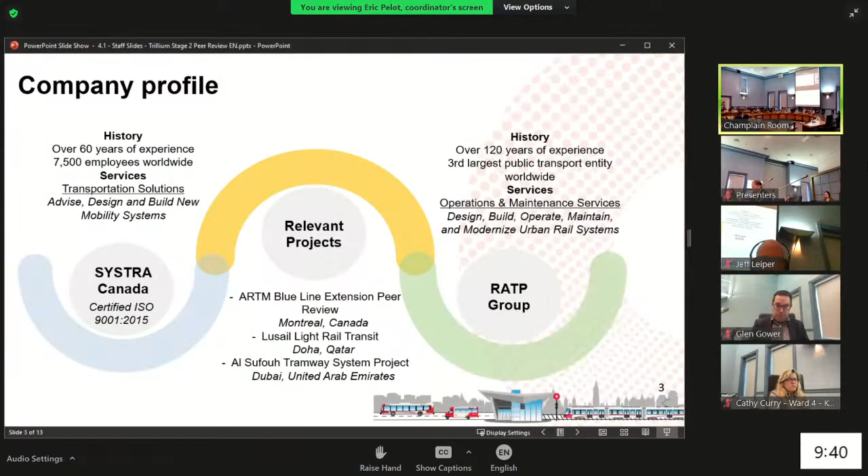Just to talk a little about the process: there was a lot of tabletop documentation reviews. We sent them design documents, review documents, commissioning plans. They also came to Ottawa to do a series of site interviews, interviewing TransitNEXT staff and city staff directly to understand the inputs to the project. They also did site visits to see what was being built and how. That culminated in a series of discussions and back-and-forths where they asked for additional information and clarification, and we exchanged documents to fulfill their requests and give them a fulsome picture of the project. That resulted in a final review and a set of 47 recommendations provided to the city regarding the TransitNEXT and Trillium Line Extension project.

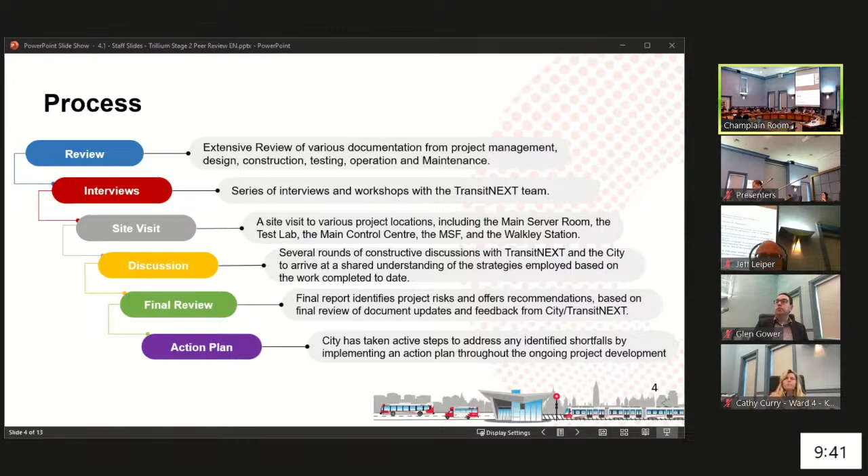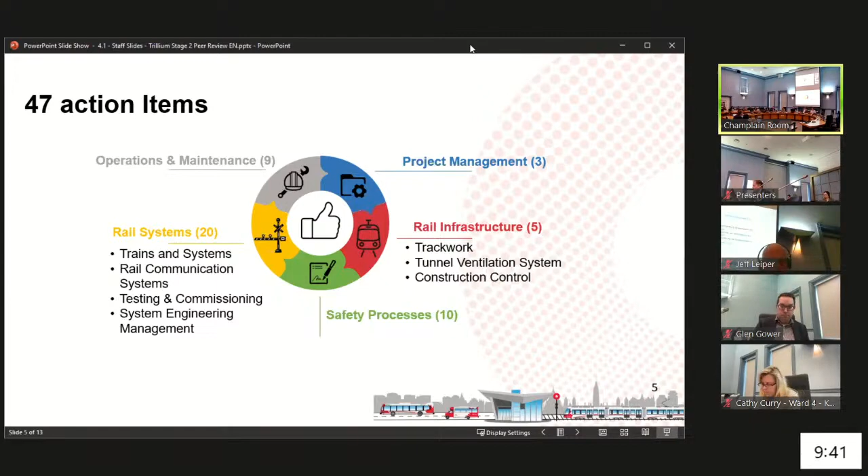So we go to the next slide, talking about these 47 action items and how they're grouped: 9 deal with operations and maintenance, 3 with project management, 5 related to rail infrastructure, 20 related to rail systems, and 10 related to safety processes. I'll give you a bit of flavor for each of those today. I won't go into great detail on individual recommendations since that's in the report, but I'll give you a sense of where we're at and the progress we've made in actioning them.

In terms of project management, there are 3 recommendations. Let's go to the next slide.

There was talk about a new baseline schedule. At one point in the project there wasn't clarity on the path forward, partly because we weren't clear on the training requirements and how those were going to be included into the project schedule. So there was a lot of work through last fall to come up with a consolidated schedule that everyone agreed to—city staff, the training department, all the internal departments, as well as TransitNEXT. That required a lot of coordination, but we did get there, and that was one of the recommendations.

The other recommendation was to have a lessons learned document to support the design and the project going forward. We had a number of lessons learned that were input into this project, and we'll have additional lessons learned that come out of it.

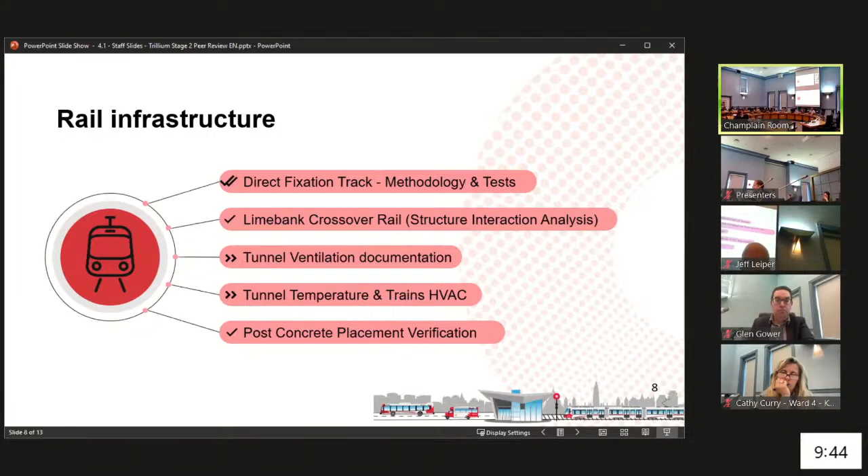In terms of the cold weather test, this was a new one that hadn't been considered, where essentially you turn the vehicle off, allow the batteries to get down to a low temperature, and make sure the vehicle can start up in the morning. We had a cold snap earlier in the year where we were able to take advantage of that weather and actually do the test with the vehicle, and it passed. So that one will be closed off.

Interior and exterior noise tests—we're saving those until we have the full alignment. We'll run the train up and down the alignment and measure the noise levels on the interior of the vehicle to make sure they're compliant with expectations. The interior test is for passenger comfort, while the exterior test is for nuisance or noise to the community. We'll be doing both of those tests in the future once we have access to the full alignment.

Bogie rotational resistive test, vehicle vertical gaps—a couple other ones that we're good with.

One more that we do need to do is the GEBR, or Guaranteed Emergency Brake Rate Test. This is a test where you're basically forcing an emergency brake on the train on the tracks to ensure that you meet the minimum stopping distances. So this is really putting the vehicle through its paces. Again, we want access to the complete system to do this type of test.

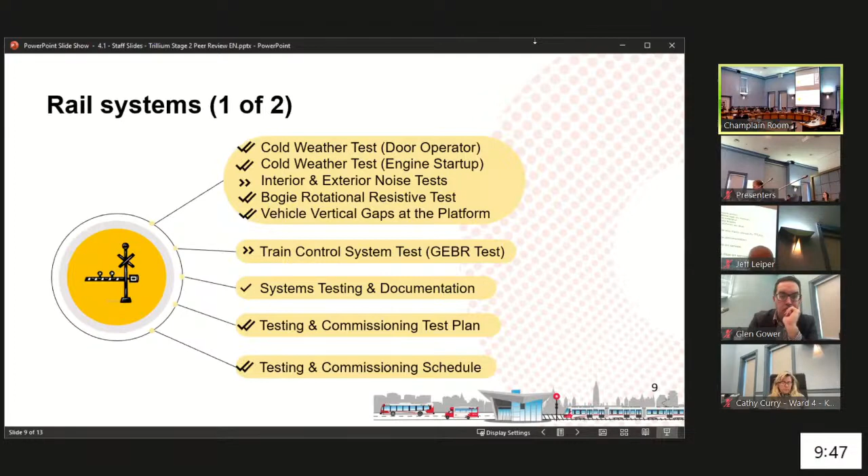As we think about the Trillium Line going forward, we need to think about how to incrementally add double tracking along the alignment. The crux of the problem is really in the north. When you go from Greenboro to Bayview, that's where we have the rock cut, the road structures, and the bridges. That's where the work is required in order to add more double tracking and reduce the headways. That's how we would get additional capacity in the future.

There were some questions about minimum achievable headway and South Keys turnaround time. Some of those things we will demonstrate and validate during the testing program. Once we have the complete system and can demonstrate the 12-minute headway, that's where we'll start to play with the trains in and out of South Keys going to the airport and along the main line, making sure the passing meets are correct, and making sure staffing levels are suitable for the turnaround times at the end of the line—at Bayview, at Limebank, at South Keys, and at the airport.

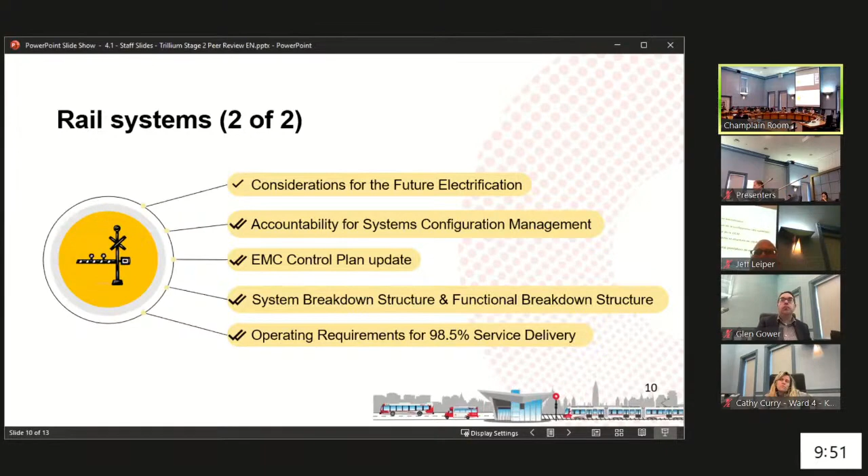So with that, that's a quick run through of the 47 recommendations, and happy to take any questions you might have about those. Thank you.

Questions from committee members? Councillor Leiper. Thank you. I may need to go back on, but I'll get through a first batch to begin with.

The first question, I'm wondering if the representatives from Systra, who I believe are online, could we just hear from you the degree to which you agree that the staff report that's been sent to council is a fair representation of the current situation, a fair characterization of your recommendations?

You mean the presentation that was just done right now? The oral presentation, but we were also given a written staff report that characterized what the recommendations were and what the staff response was. I'm hoping you've had a chance to read that and can characterize it as an accurate summary of this process.

I believe we did not get this report that you are referring to. However, the presentation that was done reflects what we have said in what we have written in our report. Okay, thank you.

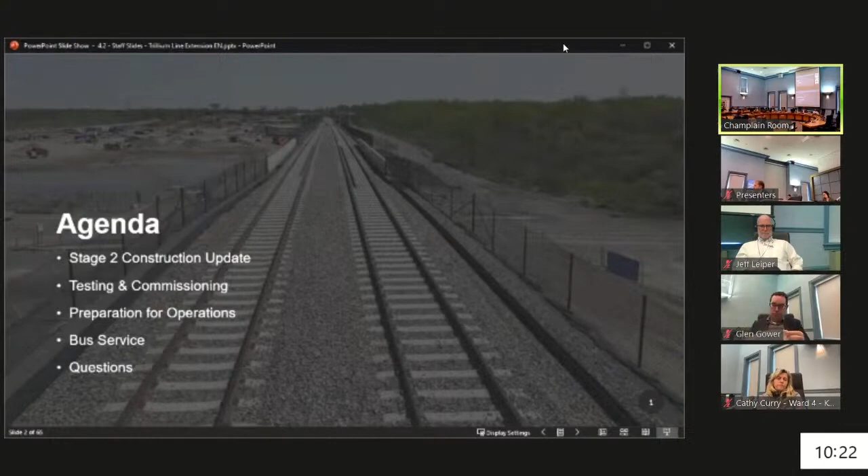So talking about the O-Train South, the next slide talks about Line 2 and Line 4, the new nomenclature we're using for the lines. We'll start at the next slide, which has a photo of Bayview Station.

So Bayview Station, this is the new head house. As we go through construction, I am going to point out some things that we are speaking to the contractor about deferring - that is, we want them to prioritize staff and construction activities on things we need. One of the first things we've discussed with them is the idea of deferring completion of the Bayview pedestrian bridge.

I'd rather have them focus on other stations that we're actually going to be using. That bridge, as you can see in the photo, doesn't go to a development just yet. So we've essentially agreed with them to put that on the back burner and come back and finish it later - that would include the elevators and the pedestrian bridge structure you see on the right.

In the middle of the picture, there will be a fare gate bank and an additional entrance for people coming from that direction, so that will be opened. But the rest of the pedestrian bridge isn't required for service this year, so we basically told the contractor they can prioritize other works on the project.

Next slide, we'll talk about Corso Italia. On the right-hand side is where Ottawa Community Housing has a development in the works. On the left, there's a development application in place for a tower.

So it'll be a very busy community. You see the platform doesn't look finished, but they've got a lot of protective measures on the actual platform itself to prevent it from being damaged. The glass is largely up. If you go to the next slide, you see a side shot. The glass is largely in, and there's some finishing works on the roof lines. Down on the platform level, they are staging some of the glass, but the transit shelters are in, the light stands are in. It's in pretty good shape in terms of the station.

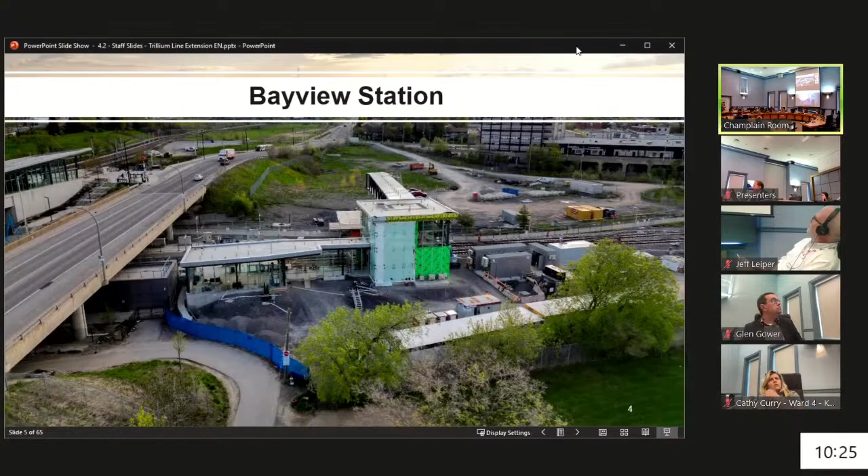The next slide just shows the platform view. You see the platform edge on the left, covered in plywood just to protect it from construction damage. The tracks are in place. Those on the left actually lift up to allow a freight train to go through as part of the federal regulations. You see the glass on the right, the bird-friendly glass for the elevator banks.

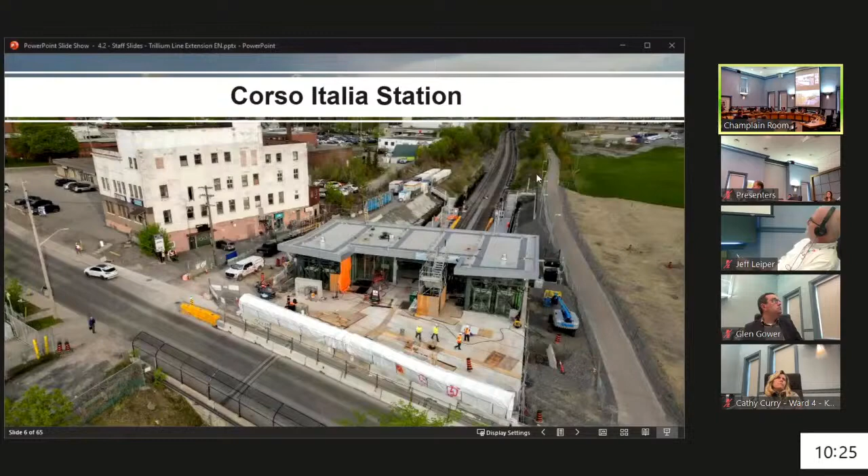In terms of guideway progress, it is coming on well. We have one little gap on the network right now at Hunt Club Road. Otherwise, the tracks are in everywhere, and they're doing some touch-ups. That piece of equipment you see is basically like a person lift that runs on the tracks, allowing them to do work on the cabling and such in the tunnel.

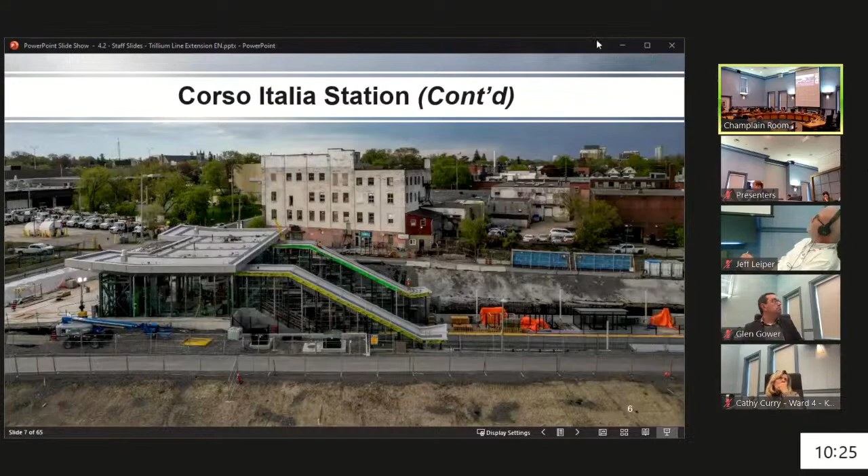So on the next slide, you see the tunnel, the new top corners, and the new jet fans we've installed for the tunnel ventilation system, the cabling along the side to provide radio coverage for emergency radios for emergency responders, as well as the coverage for cellular phone calls. So a lot of progress there.

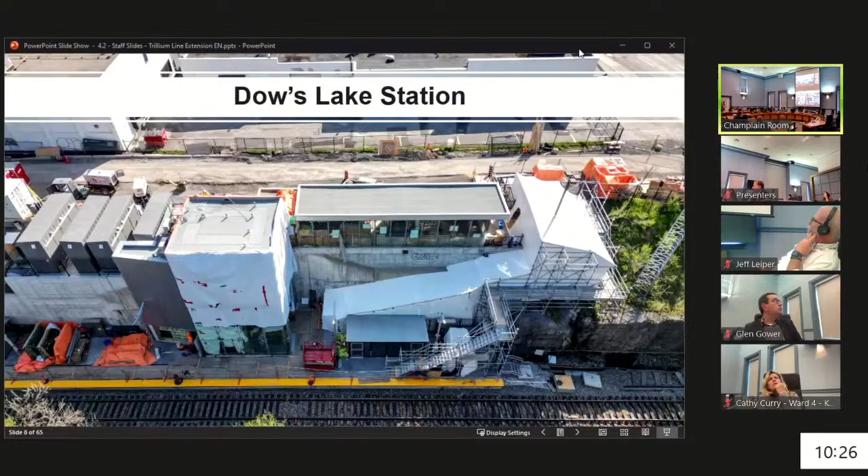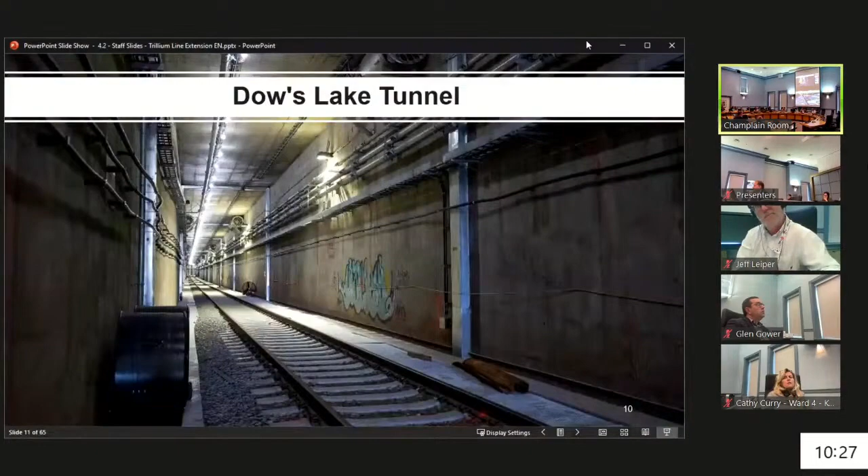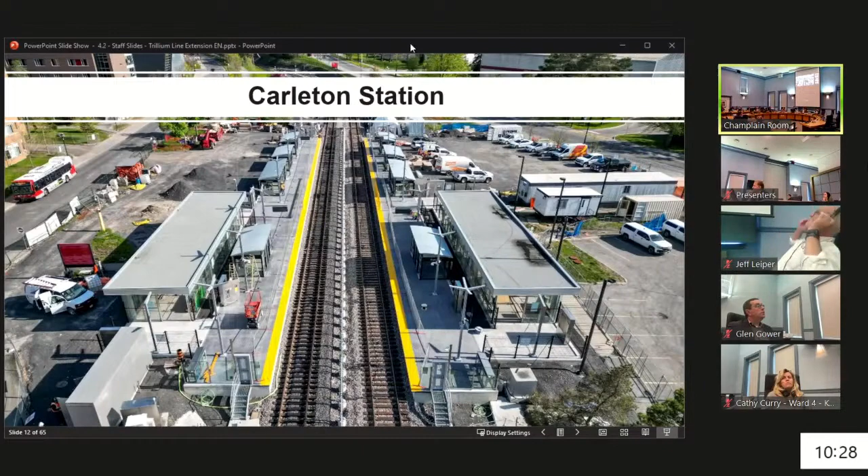There's been lots of questions about the multi-use pathway that connects to the development. That's just been paved recently. We're looking to finish the final connection into the development, and at that point the multi-use pathway would be restored to get from the general area of that development, Bank Street, up to the entrance of the station.

The station platform down below is in great shape. It's essentially finished, so this is probably one of our most advanced stations. Now we'll see some shots of Albion Yard.

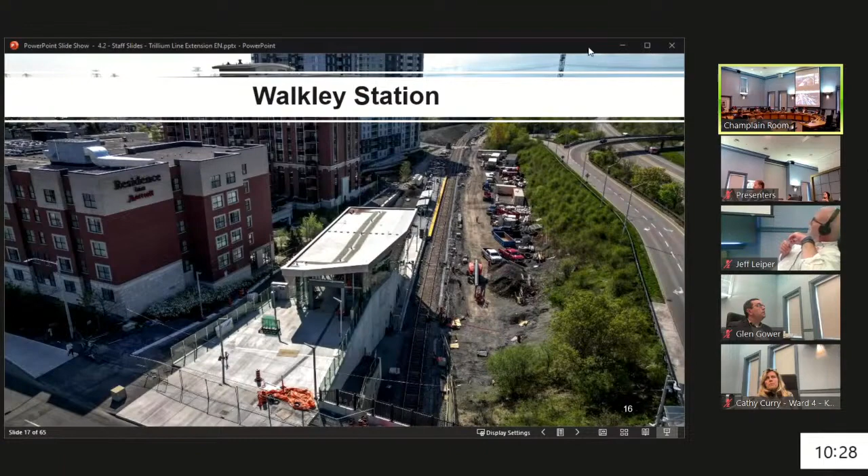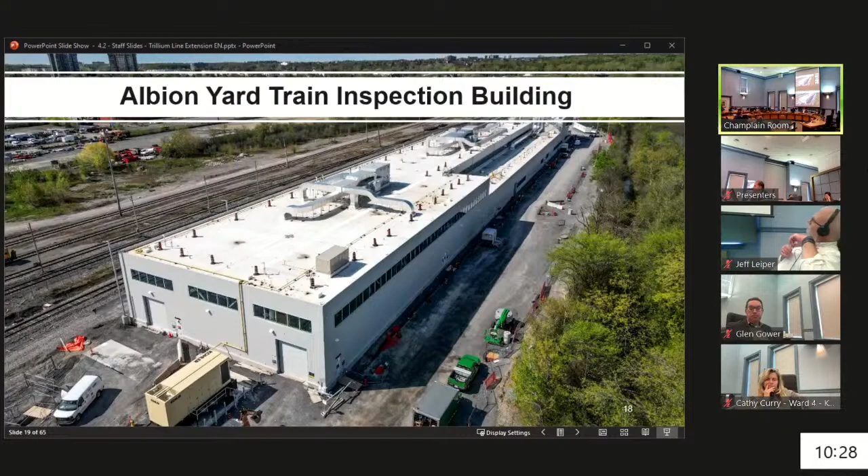We continue to do some works on Albion Yard. Here's an inside view of the jacking equipment to work on the trains, and the jacking equipment's in place. There's the lifts to work underneath if you need to do a bogie replacement, so that's a big series of lifts for the vehicle.

The next one shows the wheel lathe. In the previous incarnation of the Trillium Line, we didn't have a wheel lathe, so if we had a wheel flat, we'd have to send the wheels out for service. That was a bit of effort we had to do previously. Now that we have the wheel lathe, we're in good shape. We didn't have many problems with wheel flats in the old system, so I'm not expecting a lot of issues, but we have it in case there's an issue.

Greenboro Station shows basically finished as well, moving on to the landscaping at this location, which is a very good sign - a pretty good indicator that they're wrapping things up.

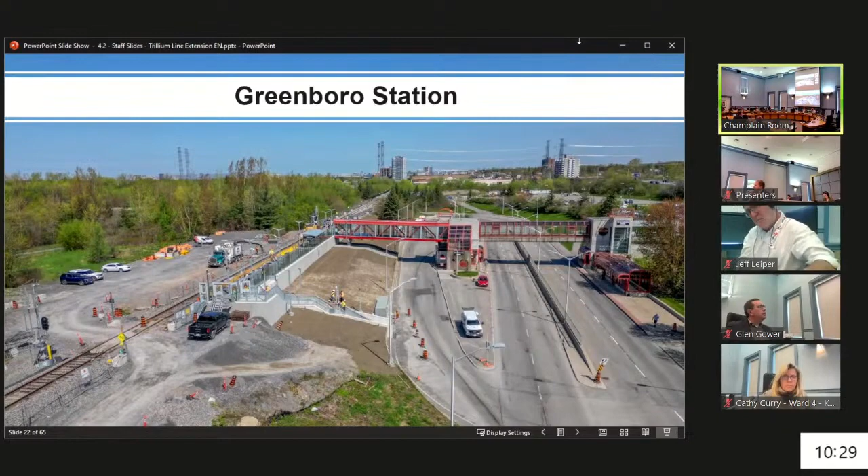South Keys Station, still a lot of activity here, some finishing on the roof line. Platform's in good shape, all the glass is generally in place, and they're doing some work on commissioning the systems now.

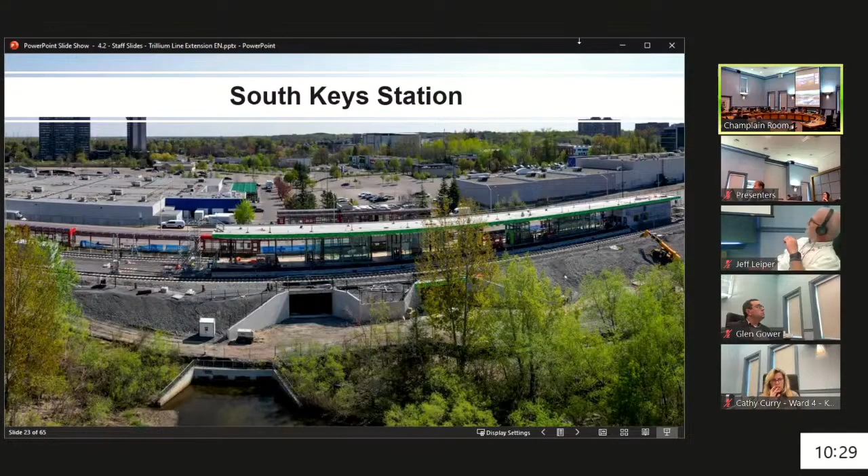Leitrim Station next, just to give you a sense - they are finishing that roof line, but if you look down at the bottom, all the glazing is in place. The next big activity in this area is to start the work on the park and ride and the bus loop around the bus operator building.

Just a look at the platform of Leitrim, you'll get a good sense of the completion. The fence that's there is just a construction safety fence. You can see the platform edge devices are flipped up, and that's to allow a freight vehicle to go through if it needs to. Those are on all the stations on the line.

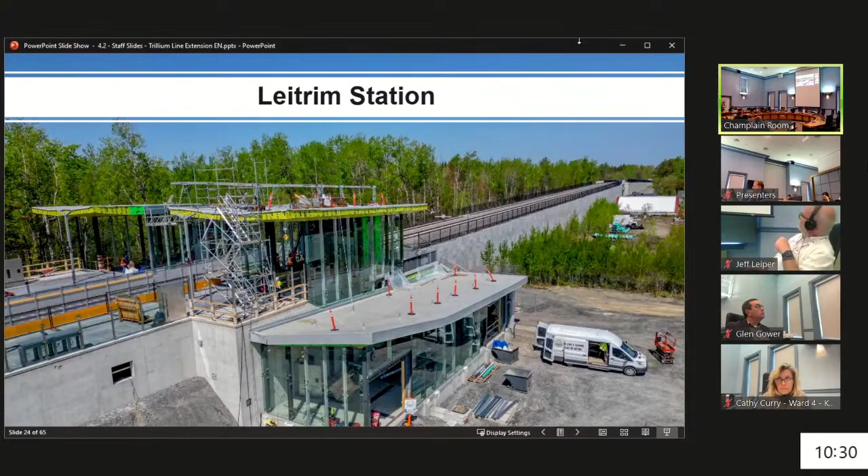Next we'll see Bowesville Station - pretty good progress here. The next big activity is finishing up a little bit of that, closing in the yellow you see on the roof line, the green on the sides, and then working on the park and ride that's in the distance in the photo.

Limebank Station is next. Here again you see them finishing up where you see the white tarps - that's where the elevators are still being commissioned and putting in the final glass. We visited the station the other week, and there's a beehive of activity and a lot of progress here. The next big activity in this location is to get the roads and the bus loop finished.

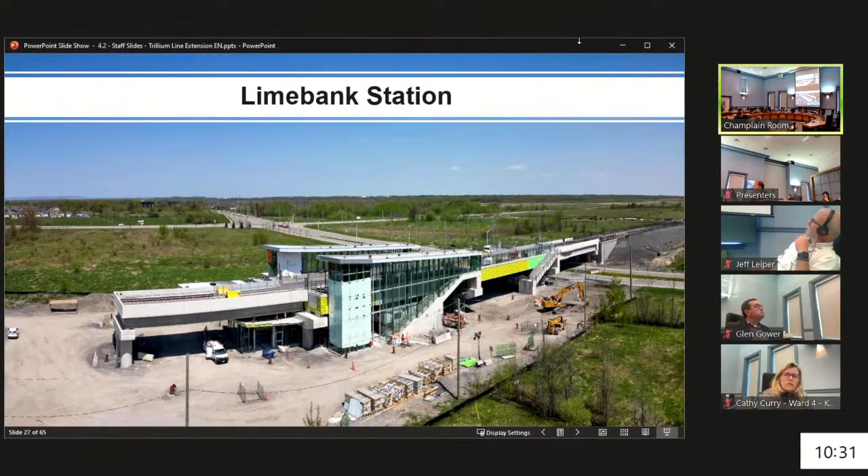There's a photo of the train at the station, which is very exciting - there's also a short video of that we'll show after. Uplands Station, next to the Ernst & Young Center, is in decent shape as well, a little bit lagging behind in terms of the roof work and finishing that up, but that should go quickly now that the weather's turned.

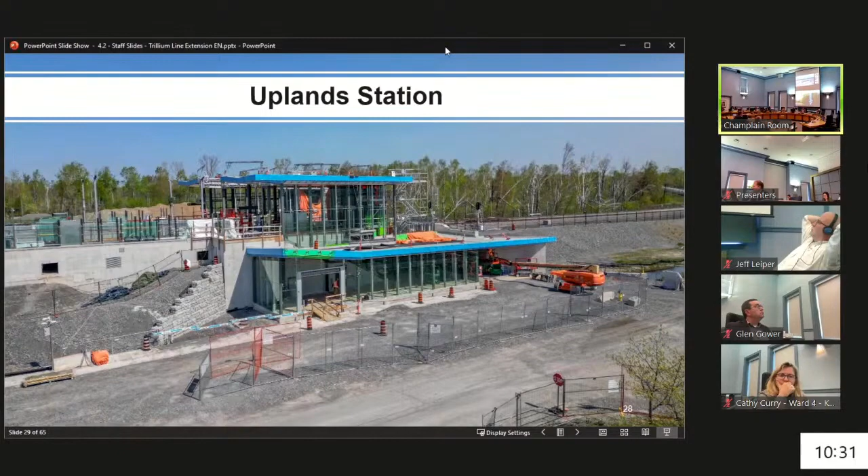In general, the signal progress is going well. They are planning on commissioning all the signal systems over June and July, and by the end of July we'll have a good sense of where we are with the signal systems and the signal testing.

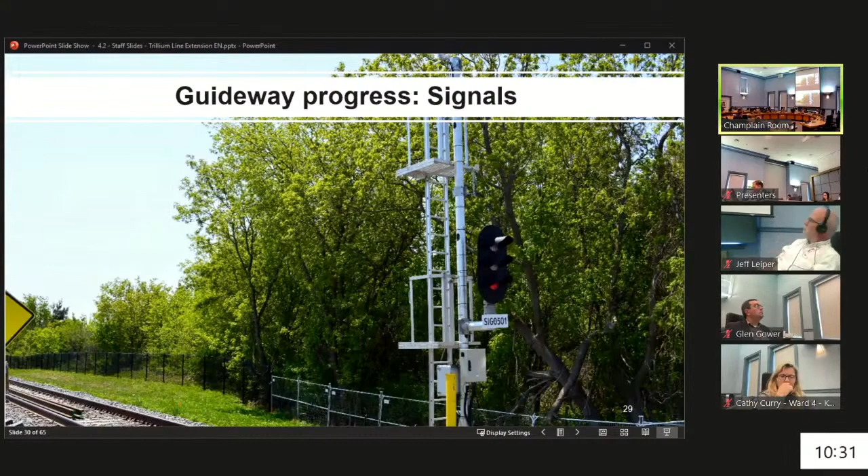At Airport Station, basically the only thing missing is a fiber connection back to our control center in order to enable the fire system. Otherwise that station's largely complete. They're working on the signals at that location. You see in the middle there's a little signal tower, but the first train was out there the other week. So good progress all around there.

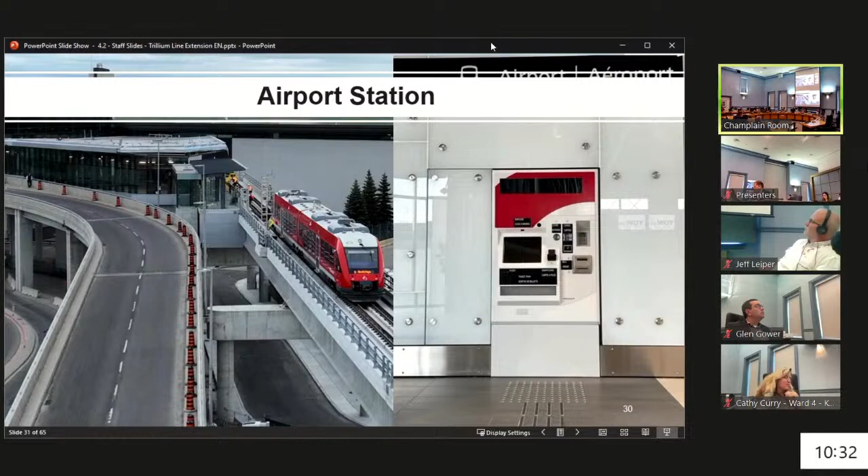So that's the construction eye candy. I'll go through some of the details on the actual report that we provided. Next slide, we'll jump right in.

Talking a little bit about remaining works: track installation, that's the little chunk of track required at Hunt Club, Stadler vehicle testing, signal testing, station completion is really where we are. And then trial running, substantial completion.

In terms of the mobility impacts, we don't need to spend too much time on this because a lot of the mobility connections have been restored. The big ones the community is excited about: at Hunt Club Road we are going to put a pedestrian bridge. It's built, it's there in place, but we need to connect the multi-use pathways to get pedestrians to the bridge, and then they'll be able to get across Hunt Club, and then the Rideau River pedestrian bridge. So pretty good shape there. The mobility detours and impacts are reduced significantly now compared to a year ago.

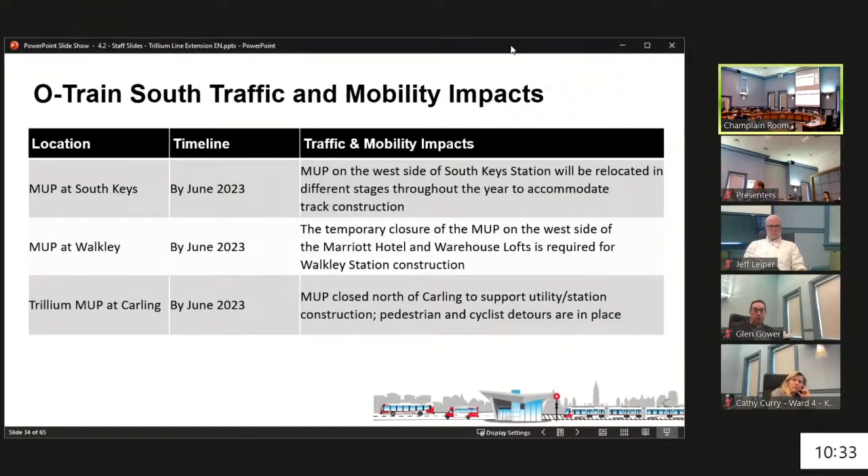The next slide talks a little bit about the impacts on a couple of different locations where we just need to be on the lookout. They are still doing lots of heavy activity, so there are moving closures for some of this work. We talk a little bit about the road work, and obviously the big one in the south is realigning that Bowesville and Earl Armstrong intersection. That's a big change in the south.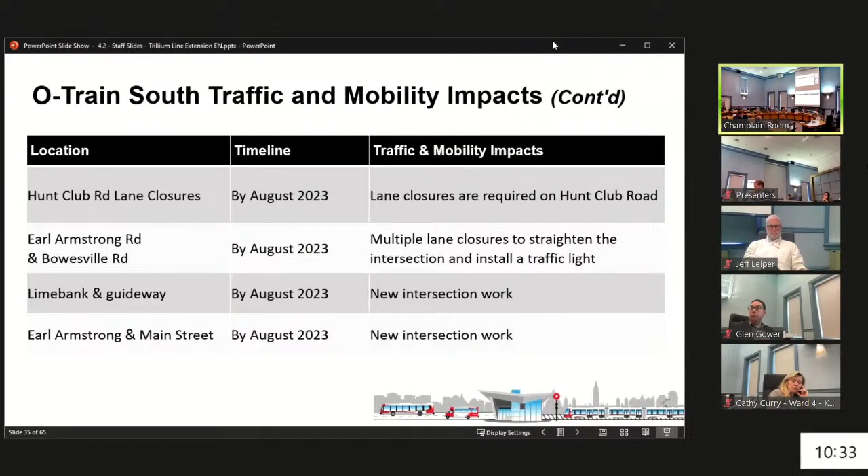This is some of the information that was included in the report. Generally on a big project like this, the number one thing is to make sure that we don't have a safety incident during construction. If we have an issue with a train or a worker or anything, that could potentially cause human harm, which is unthinkable, but would also have an impact on the schedule. So we're doing everything we can to avoid any incidents during construction, during testing, commissioning.

The second part of that is if we find a safety issue during the testing program - we go to run the trains, run the system, and find some odd behavior that from a safety point of view we hadn't picked up during design - that's not covered. If we needed time to rectify that, it could create additional time and pressure on the project. So that's the first point we're tracking: safety during construction and safety of the design.

The second thing in terms of project risk we're tracking is the system performance testing. We've talked about the 12-minute headway and turnaround time already. We need the system to work and to work reliably. If we have any issues with the trains over the summer or the testing program, that could be a challenge and could require time to correct. If it's a big software change affecting the signal system, which is safety critical, that would require time. So that's something we're watching and monitoring to make sure we don't have any issues.

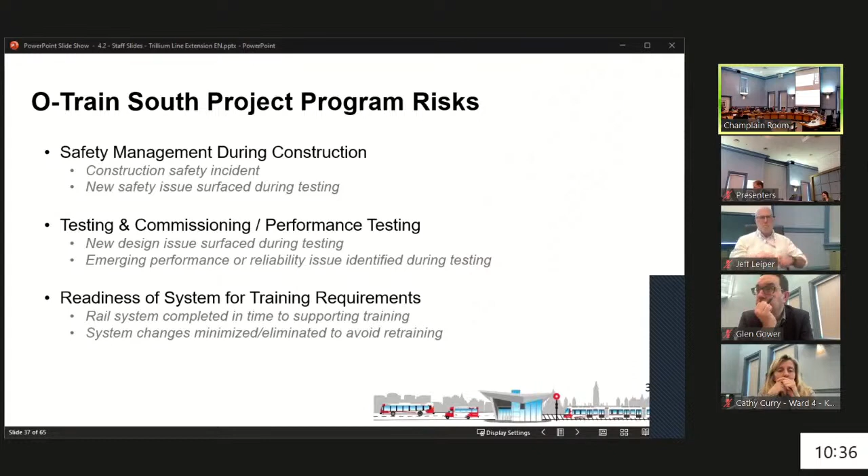There was a new regulation that came out over the course of the project in relation to a locomotive video and voice recorder. That's a device in the cab that's looking at the operator, monitoring their activities and recording any sounds in the cab.

That's a new federal regulation. Those units have been purchased, but the supplier has indicated a delay with those units to September. So we're tracking that closely. We have a follow-up with them in June. But right now, that is a potential risk to the project.

And there are other regulatory risks that we see arising. One of the items, for example, we've been asked to put a wayside detection unit on the system. Not that we've ever had a problem or an issue with journal bearings or vehicles that required a wayside detector in the past, but I think partly stemming from some of the things that we saw in stage one, Transport Canada has asked us to put that in, and so we're tracking that.

So there are things like that coming up from the regulatory point of view that present some risk to the overall schedule. The next one on the slide there is just the remaining works. When you look at some of the stations, some look very advanced, some are a little bit further behind. The park and rides, they need to make good progress on those over the summer.

There are some elements of the park and rides that we've said they could probably take a little bit of extra time with. We're still kind of negotiating that. There are some secondary roads that aren't required at the outset of revenue service, and so we may work with them to see if some of that can be deferred in order to make sure the overall project opens in a timely fashion. And then, as you continue civil works, if we find anything in the ground that we didn't expect, that will be a challenge as well.

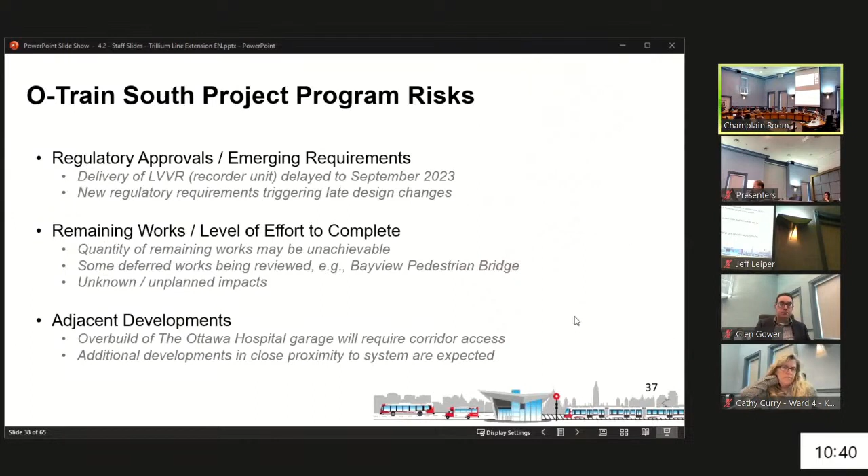The tunnel ventilation system needs to be brought online. So we test those as much as we can in the factory. Then we bring them to the field, test them in situ, and then we test the connections and connectivity back to the control center to make sure it's fully integrated. And then that ends with system-wide performance testing.

So it's really just running the trains, 12-minute headway, with 9 trains in service, 2 on the Airport Link and 7 on the main line, making sure we can meet the performance criteria, making sure they're reliable, that we have no issues, and all the switch machines are reliable. So the proof is in the pudding. We need to run that system August and September to really know that we're ready for trial running.

I spoke about it earlier, the head end. If you go to the next slide, this is a quick snapshot of the temporary test lab that city staff have built in one of our facilities, where we've set up all the servers on the desks. You see the various servers for the different devices on the wall. They've actually mounted a speaker and a camera against the plywood. There's a platform information display on the floor. So they've literally built a little mock transit operations control center in the room to validate that everything's working. Once that's done and complete, they'll move that equipment into the control center, into its final place, and then the operators, the controllers will start using it from there.

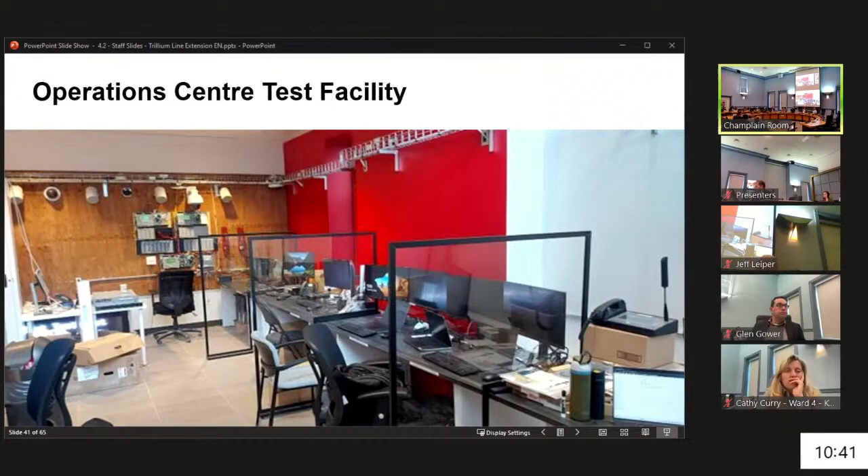If you go to the next slide, we're going to talk a little bit about trial running. There are 4 slides here to get through and provide as much clarity, and give you an opportunity to ask questions about the trial running process. Obviously the primary intent is to demonstrate that the system is working end to end, that all the processes are in place, that maintenance staff know how to maintain the system, and that operations staff know how to operate and control the system. So those are the big objectives.

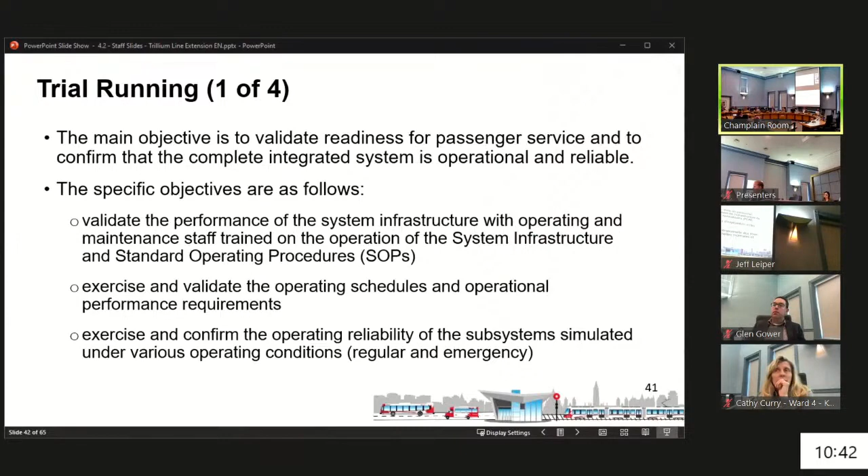As a result of the public inquiry, we have asked the system integration verifier, Ricardo Rail, to provide an independent view on trial running results, any changes or modifications to running times or different things, so they would be there to provide an independent view, and they would be part of the reporting back out to council on the trial running results.

Renee has talked about it previously, and we're committing to it again here: providing daily reports to council during the trial running period, followed by a technical briefing at the end of the trial running period, giving you day-by-day results, rolling average outcomes from the procedures, the testing, the different scenarios that we do prior to going into service.

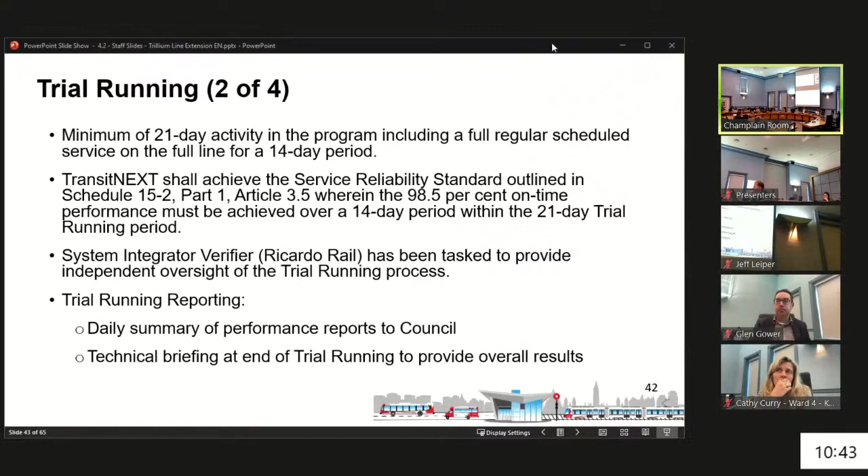On the next slide, 98.5 is a roll-up of a lot of other things. It's simple to say 98.5, but it requires a lot of things to take place correctly. For example, the vehicles need to go out on time in the morning, clean and ready to go. They need to come back at the end of the night, be refueled, sand has to be added, they have to be washed interior and exterior, and need to be ready and staged to launch on time the next morning. It can be great to run a perfect score the first day, but all those vehicles need to come back into the yard and be set up for the next day. So there'll be a team of people on our side monitoring all those inputs.

It's not a specific measure in the output, but if those inputs aren't done correctly, then you'll never hit the 98.5. If they can't fuel those vehicles overnight in a timely fashion, we won't hit the 98.5. So there'll be a team monitoring all of those inputs, looking for safety incidents, looking for anything that's a no-go to our customers. Like if we lose a set of elevator banks at a station, that's just not an acceptable scenario to us. So this is a snapshot of that list.

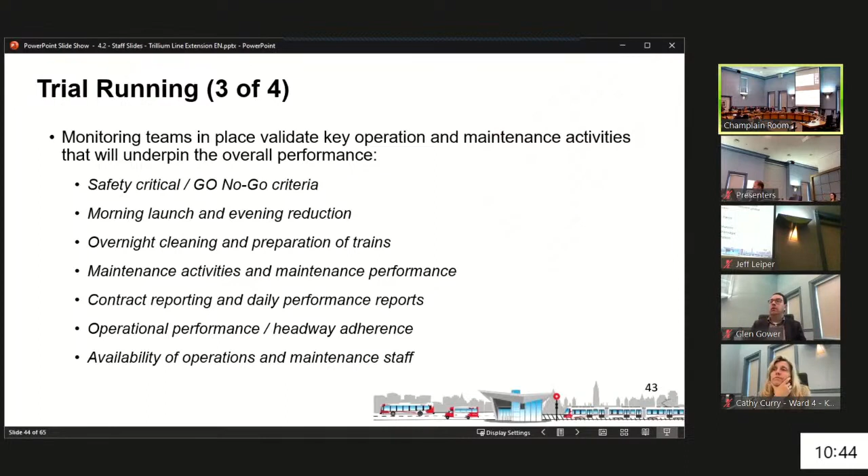We may circulate another version to give you an opportunity to provide feedback. 98.5 is the big one, the work orders is a second. We assume you'd also want additional commentary or color around how the day went, so we can talk about what that would look like. We're happy to provide feedback or information the following day about the day's performance, to give you a clear understanding of what's taken place and what's not.

So that's trial running, and I'm happy to take questions at the end about that.

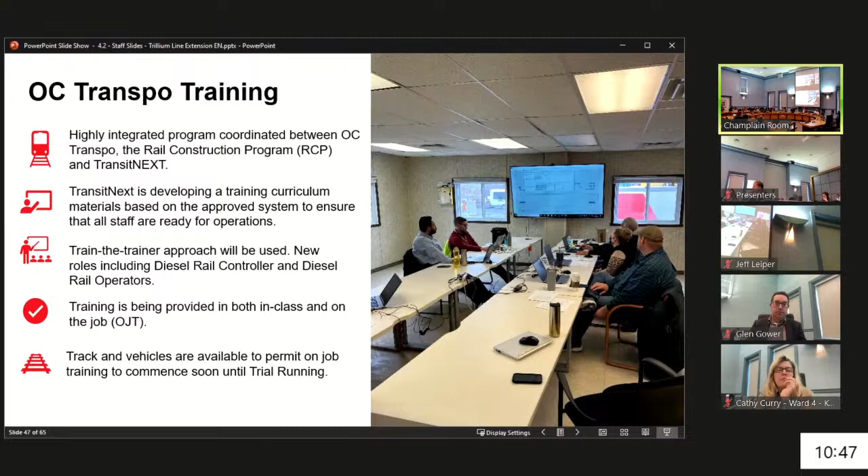There's an app built in stage 1 that's being expanded in stage 2 for emergency responders to understand the system and how it works, including the access points along the guideway. If a train gets stuck and you need an evacuation, what's the nearest point you can get to? There are some remote locations on the Trillium line, but there are also a number of access points along the line where they'd be able to get to.

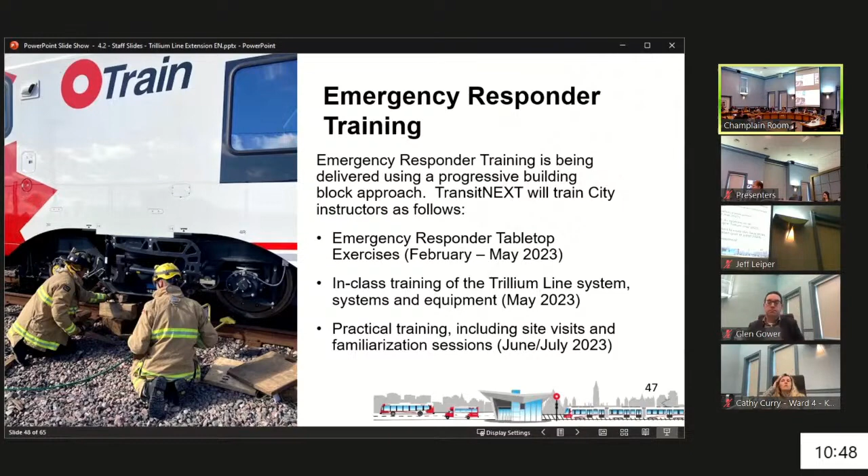On the next slide, we've been doing integrated tabletop exercises between operations, emergency responders, and others. There will be a full-scale exercise with emergency responders and the airport authority prior to going into service, currently planned for September—a final check that everyone's trained and understands what the protocols are.

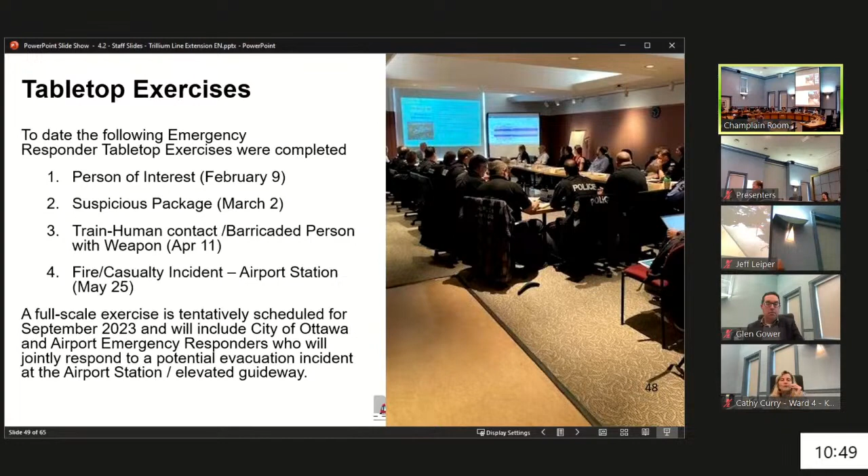So that's the training. The other big activity that leads to safety certification is the application of the CENELEC standard, and having the independent oversight of the independent safety auditor working on behalf of the city to validate that everything TransitNEXT is doing is correct. So TransitNEXT has brought a very strong safety assurance team to the table.

This slide really, I talked about those things in very abstract ways, but at the end of the day what we're looking for is a safety certificate for the system. We're looking for the design process, the construction process, the commissioning process, all to be signed off, resulting in an engineering safety case. That's really what we use to say the design and the system's been built. Once we have that in hand, that's when we can start letting passengers on from a design point of view. But that's not the final step.

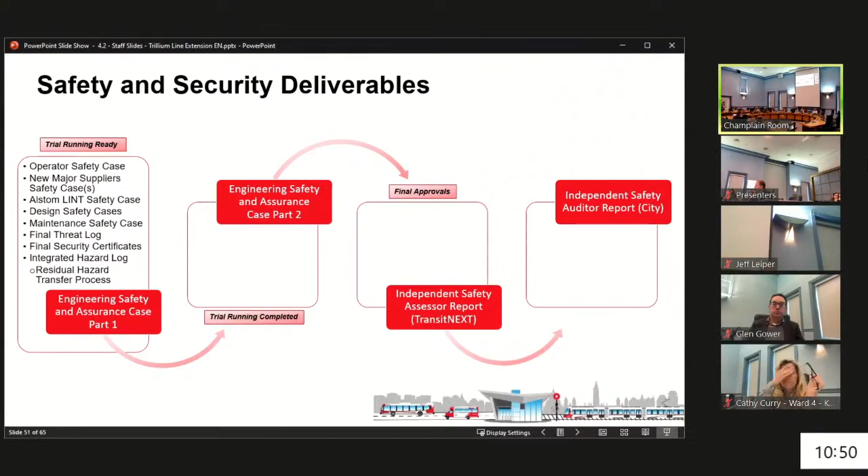That confirms to us that the design is complete, but then we need to take that to Transport Canada and show them we've done all the right steps in terms of getting the system ready. Critically, there's two documents we need: a certificate of fitness from the Canadian Transportation Agency, which is related to insurance and other matters, and a railway operating certificate from Transport Canada. That's the final check needed in order to have approval essentially to put the system into service. Absent that railway operating certificate, we could not open the system to passengers.

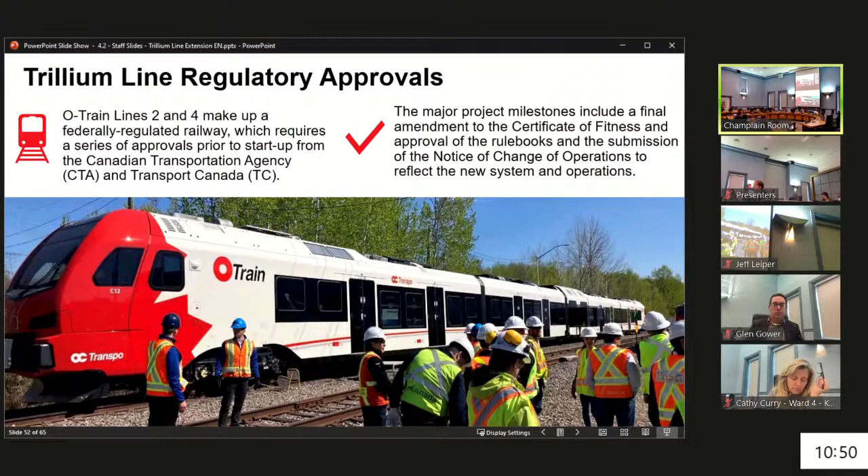This shows a high-level summary of some of the submissions that are required to be made. We have been working with Transport Canada on this issue for the last 6 years. There's a couple I would say critical ones in there. One is the demonstration that the vehicle is fit for purpose through compliance with APTA standards and other standards. And then there's a new rule book that's used to accommodate the new signal system.

So these are big changes. The big changes on the network are adding the new vehicles, the Stadler vehicles, as well as updating the rule book to reflect the signal system. So this is going to be one of the first federally regulated systems that uses an advanced train control system. That will be a first, and we've been bringing Transport Canada along the ride with us for this, putting the system into service, and they've been there reviewing and approving these documents. So that's a big piece of the puzzle in terms of getting into service.

So just to step through, this is what I mentioned, the various submissions that are made. Operations needs to provide a safety management system. There's a final notice of change in operations. We need the certificate of fitness, and then there's the railway operating certificate.

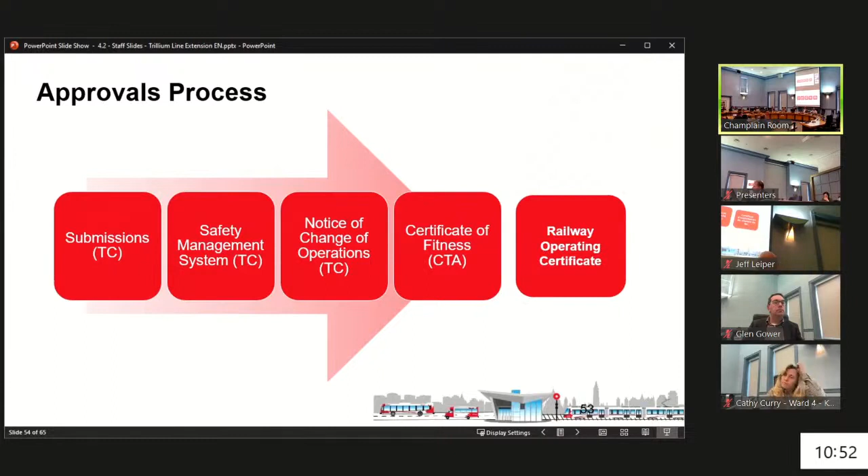We understand that this is all well in hand, and we should be in good stead to get this when we request it. Once we have the railway operating certificate, we turn our minds to public launch. In the background, to all of the work my team's been doing on the construction side, the city has a rail activation management program and a rail operational readiness program, which is a series of individual programs that all have a project lead, used to track and monitor additional activities that transit needs to do to get ready.

It's one thing to put the system into service, it's another to update the journey planner, another to test that all the bus loops work correctly, and another to make sure that the fare gates are all linked back to the head-end system.

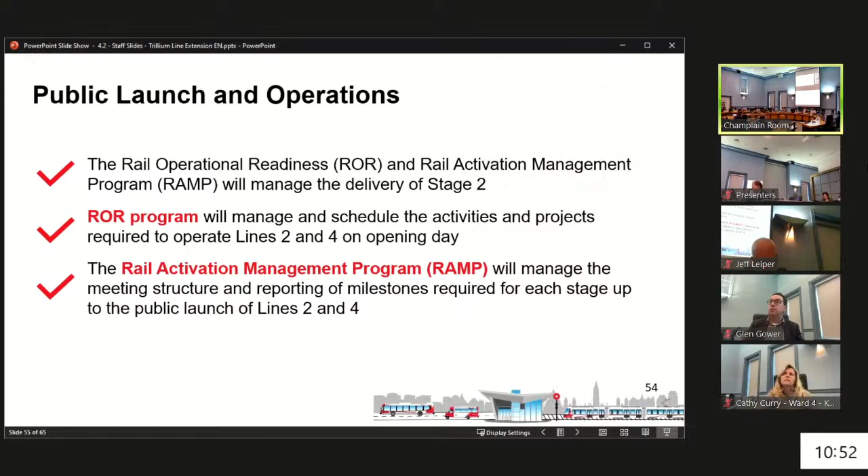On the next slide, you see an overview of the different projects underway. Each has a project lead, a project schedule, and a program charter to make sure their piece of the puzzle is ready, so that as an integrated transit system, it's ready to open to the public and all systems work as expected. So when you go to the journey planner, it brings up line 2, line 4 as options for your route that day. When you get on the bus network, the bus loop has already been tested and ready to go, and the bus operator buildings are connected through the IT systems.

I know Renee talked about bringing back this group to provide a bit more detail on this slide, but this is the group and various groups working behind the scenes to make sure the transit system is ready for service.

That is the end of my portion of the presentation. I'll now hand it over to Pat Scrimger, who will talk about the bus system and the bus transition. Thanks Michael, we'll go to the next slide please.

When the O-Train lines 2 and 4 open, we'll be revising bus services in the Leitrim area, Findlay Creek, and across Riverside South to connect with the trains at the new stations. Over the next few slides, I'll take you through the interim bus changes at the time the train opens, the parallel bus service that will run through the winter in case anything goes wrong, and then where we are on planning bus route changes, which could come into effect after the winter in the spring of 2024.

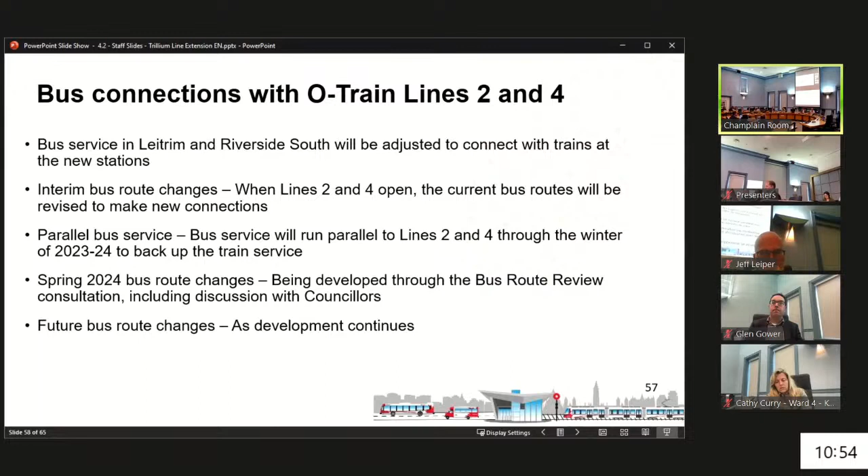So just an overview: when the line opens, whenever that is in the fall, we hope, the bus routes will be changed to make connections at Limebank Station. We'll extend Route 74, which now ends on the west side of the river, to Limebank Station. We'll change routes 99, 198, 278, 299 to make connections at Limebank, serving all the current customers. Routes 93, 99, 299 already serve Leitrim Station and will continue to do so. Route 97 will continue to serve the airport. Route 197 will have a new connection at Uplands Station. North of Hunt Club, all bus routes will remain as they are now, providing the same connections they do today.

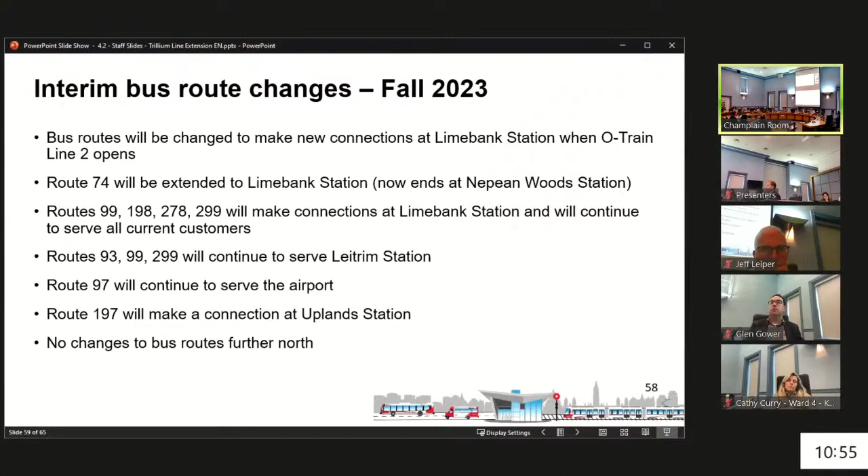That will result in changes I'll show on a map shortly. The current bus service will continue to run through the winter, so we have the assurance of backup with both the train and the bus service over that first winter of operation. We'll do that by continuing to run the current Line 2 replacement buses that have been running since 2020 between Bayview and South Keys. We'll continue to run Route 99 and Route 97 over their current pattern, and then we'll have the ability to remove those backup services and direct all customers to the train service in the spring of 2024.

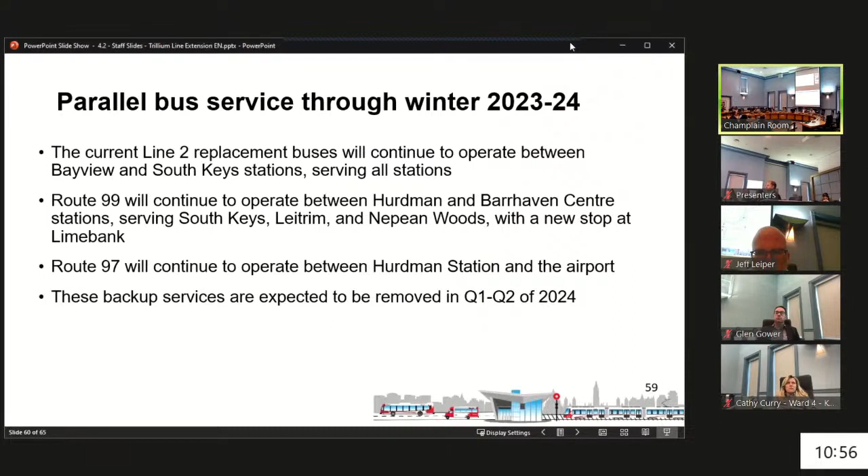Let's go to the next slide, which I think is the map. On the left, we've got a simple drawing of the current major bus routes in the area, and on the right, an illustration of how those bus routes would be changed and how they would back up the train.

Looking at the map from left to right: we see Route 74 running from Tunney's Pasture through Baseline down to Nepean Woods Station, which is Fallowfield and Woodruff. Next, you see the Line 2 buses, which have been running through the construction period from Bayview to South Keys, serving all the O-Train stations. Then Route 97, which runs from Hurdman Station through South Keys to the airport. And then Route 99, which runs from South Keys with rush hour trips to Hurdman, South Keys through Leitrim Station, through Riverside South, Riverview Station, Nepean Woods Station, and on west into Barrhaven.

When you look at the map on the right, you'll see those same bus routes, plus the train, plus some extensions on two of those major bus routes. So again, going left to right, Route 74 running from Tunney's Pasture to Nepean Woods, but then extended across the Vimy Memorial Bridge to Riverview Station and making the train connection at Limebank Station.

Let's talk about Route 99 while we're down at the bottom left of the map. Route 99 coming east from Barrhaven through Nepean Woods Station, through Riverview Station, as it does now, through the residential part of Riverside South on Spratt. Then when it gets to Spratt and Limebank, going south on Limebank to make a connection at Limebank Station, looping through there and then continuing back up north on Limebank to Leitrim Road to serve Leitrim Station, South Keys Station, and during rush hours go to Hurdman Station.

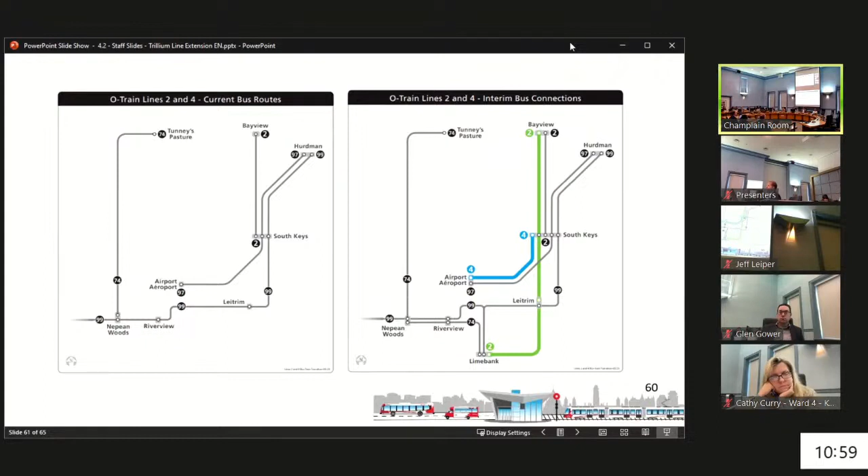We'll take an early look at what the system could look like in the spring of 2024. We're working on this through the current bus route review process with a lot of consultation — we've met with all councillors. We're going through consultation with a lot of opportunity for customers to comment, and we'll be working on that this summer, coming back to councillors in the areas affected later in the year.

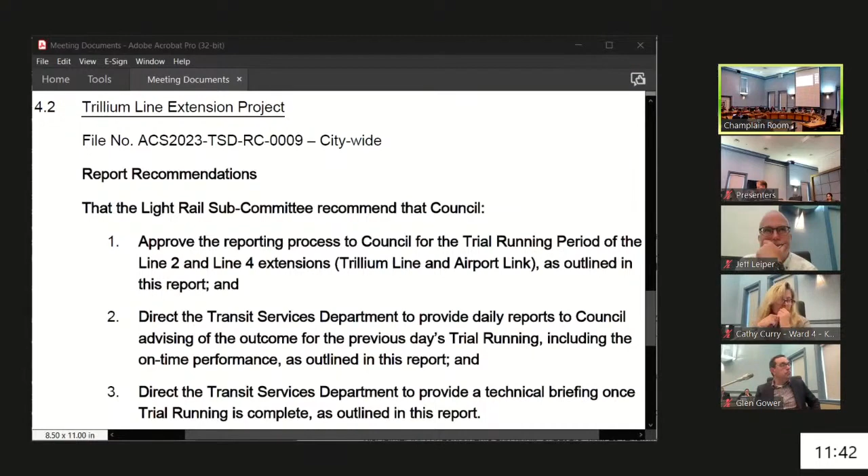No? Is that carried? Carried.